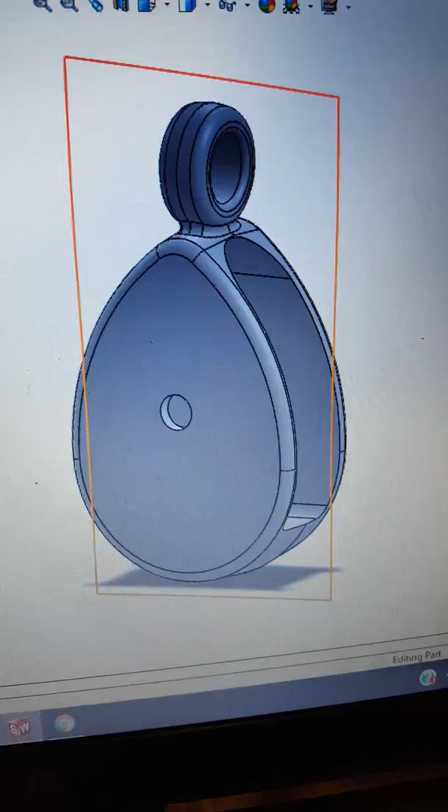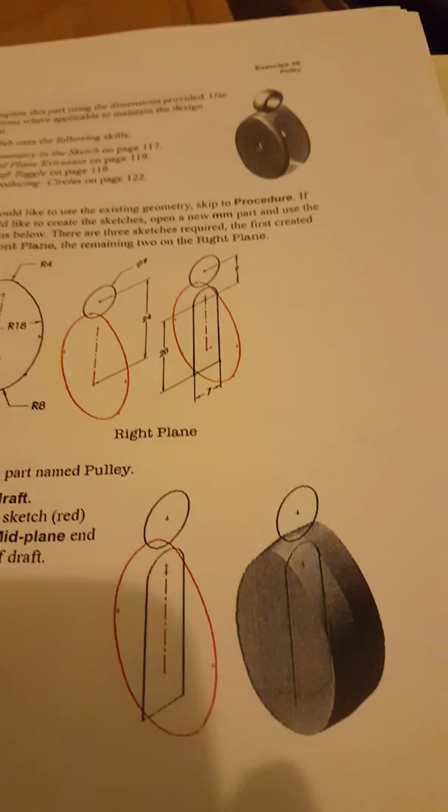Alright, Ham and Jaron, I just built that part right there. Now I did it using them numbers right there. That's what the outcome's supposed to look like. I'm using that right there and that right there.

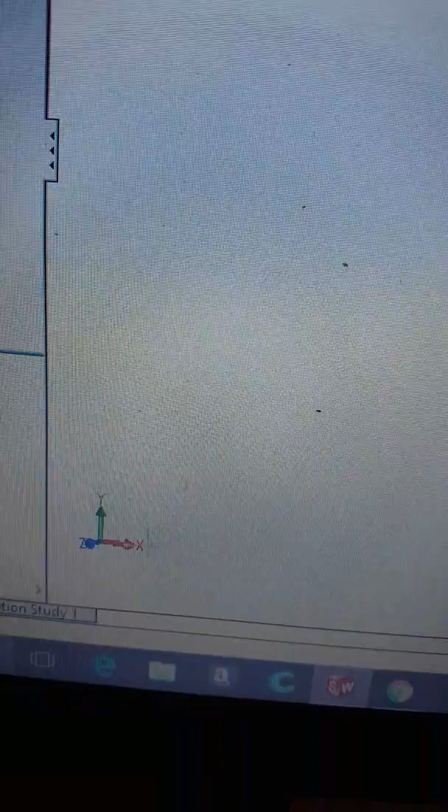I'm reading the book. Now when I point to the spot, it's going to show up as orange. That dot there, that's my origin. It rotates, that's actually the X, Y, Z axis. Let me hit it right here and show you the origin inside there. See that dot? That's the origin. Everything is measured from that point up or down.

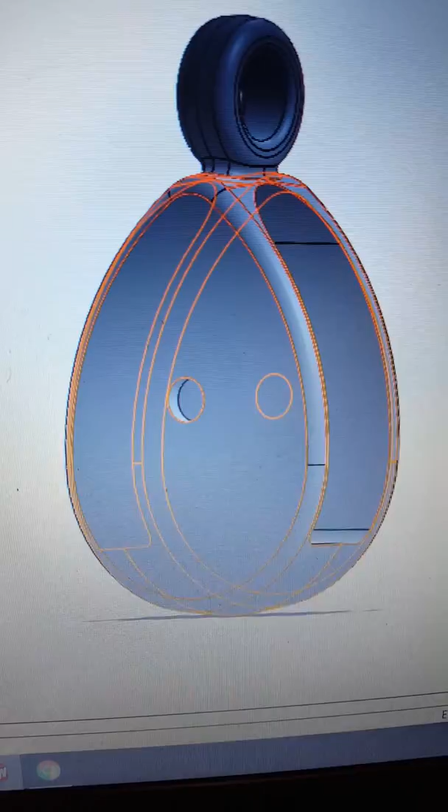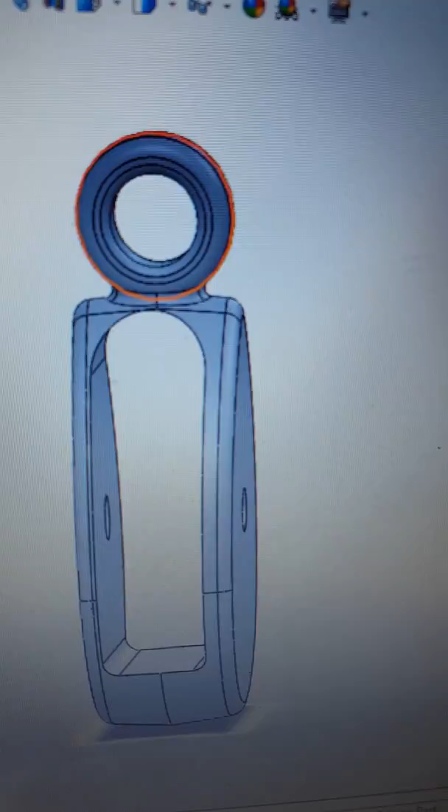And that's the circle or egg I drew. Then once I extruded it out, it got that big. Then I cut my slot in there. Drew that, cut that out. Then went back and drew that, what you see in the orange highlighted now. Cut him out. Cut the circle out right there.

Turn him to the side. Drew that circle right there. Let me turn it around so it'll line up perfect for you. Drew that circle, then cut him out.

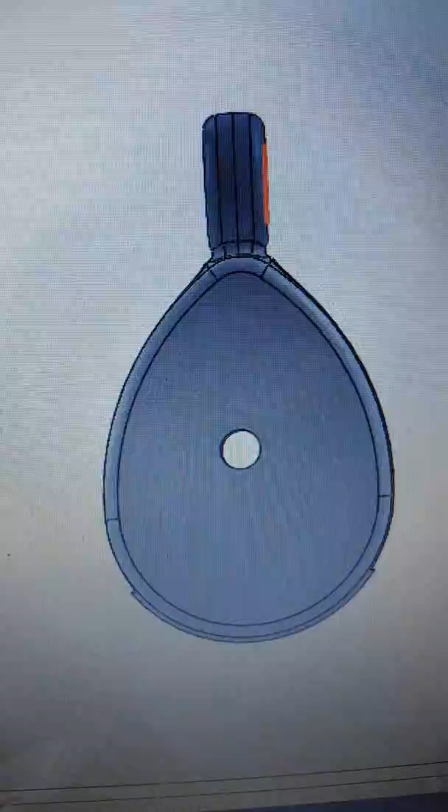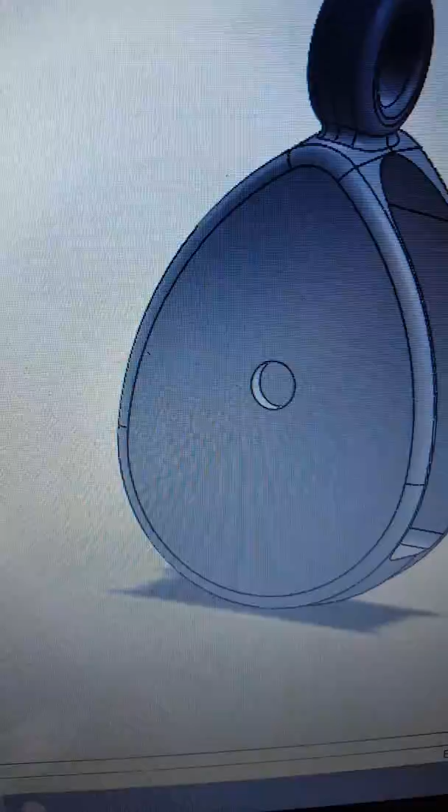Then I added what they call the fillets. That's rounding my edges off because it was sharp and square with corners on them. The first fillet I did was on the inside down there. See how that's rounded out right there? That's fillet number 1. And number 2, I came and went around my edges up there. Then the third one was inside there. And the fourth one was right around the neck on it right there.

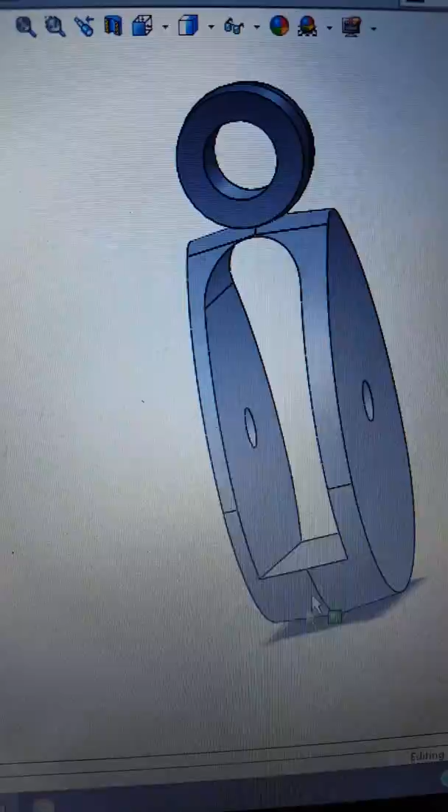See that? That's how it looked before I put any of the little fillets in there or rounded edges on it. Right there.

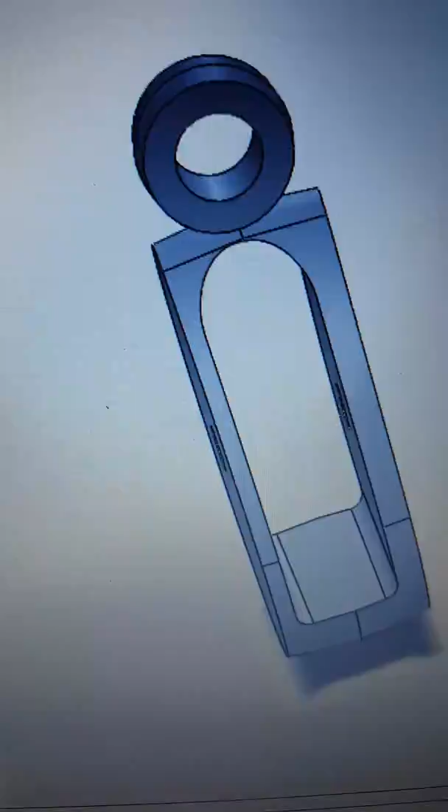Put the first ones on, watch the edges turn around. See on the inside I snapped to it down there? Now the next one's gonna be these outside edges or corners. I'm gonna round them off. Boom. See how they change?

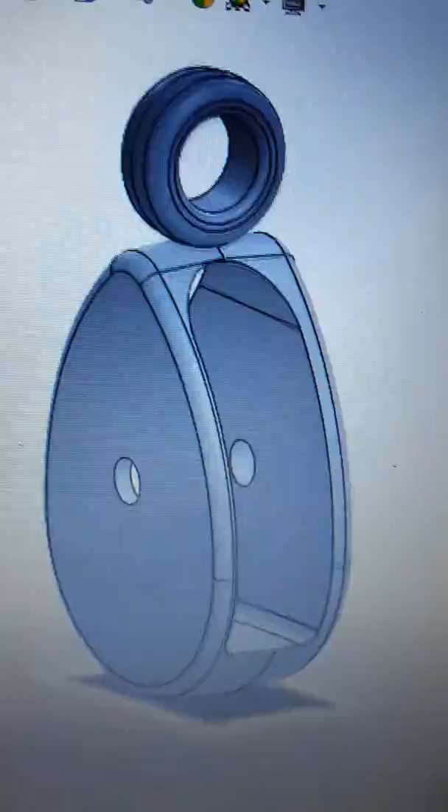See the square? Now watch right inside that circle there. See how that changed from squares to rounded, non-sharp edges? I'll look right there real careful and watch this. Added the last fillet. Boom. And there it is.

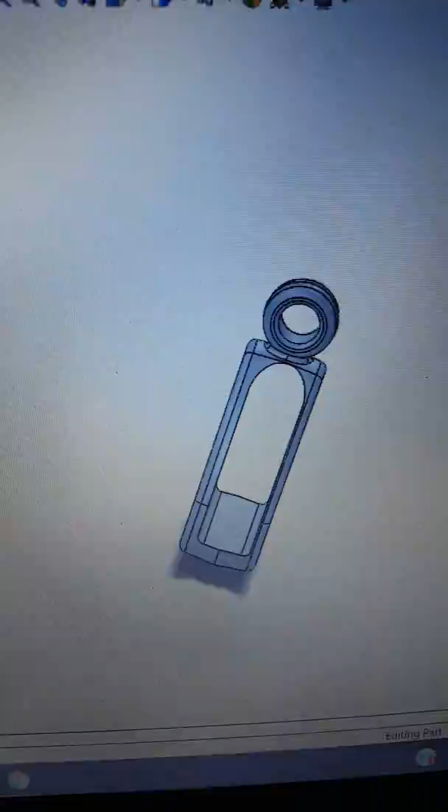All part of my homework, fellas. That other software program I gave y'all to use, its expiration is almost gone on it. I only had 1 year of free service with it. This one here is way more complicated than that one. Not really complicated. I'll put it this way, that stuff is a Volkswagen, and this software I'm using now is a Ferrari. Put it that way. Way better performance.

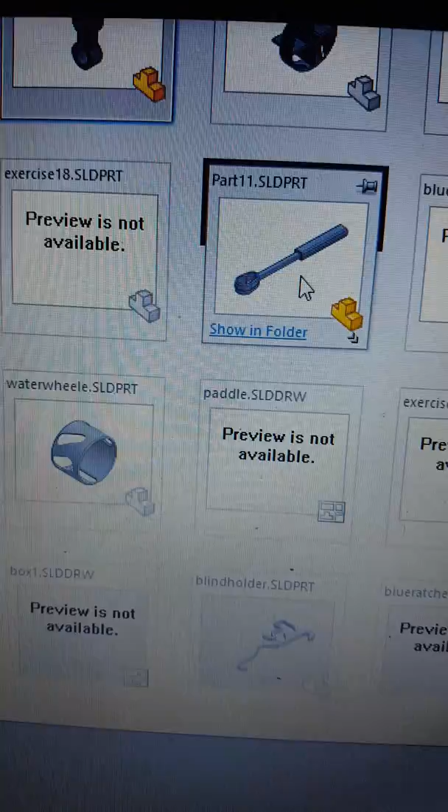Now, let me see here. Show you some of my other homework lessons I've had to do. That's something I'm working on right there. I built that ratchet. That's a box I'm working on, something else, and another part I had to do. All from just this part right here I'm getting ready to show you.

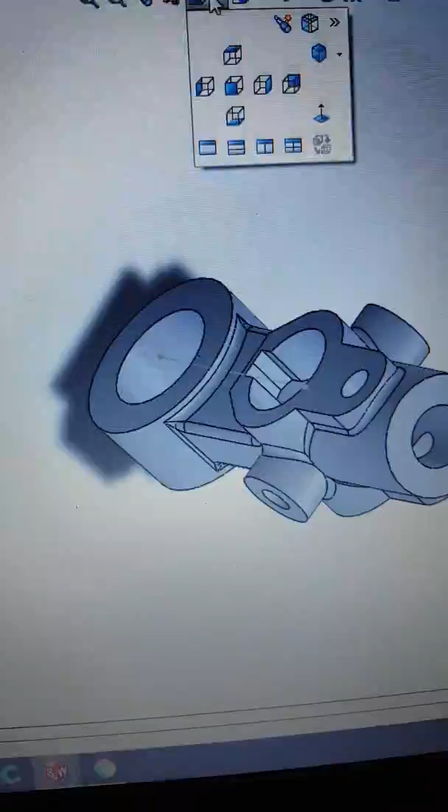I built that from just numbers. Numbers only, that was it. Built that whole thing from just numbers. Gave me numbers and a picture of what it's supposed to look like when I got finished.

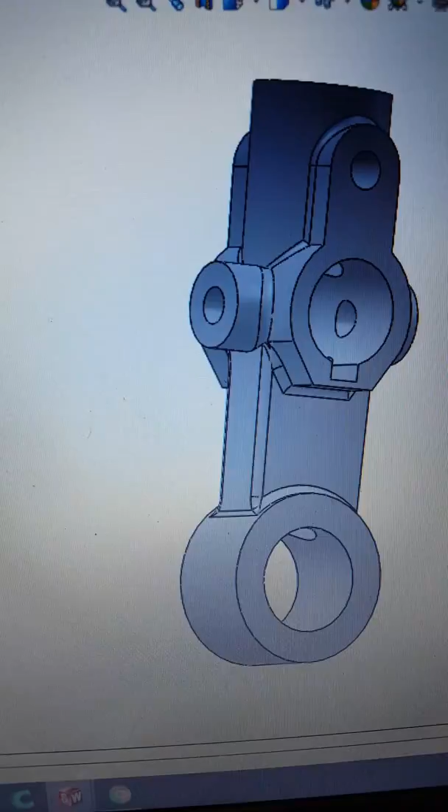Let's see here. Let's roll it back to there. That's what it started with, that one little circle. Then I came in, put my center line on there, added another plane to it.

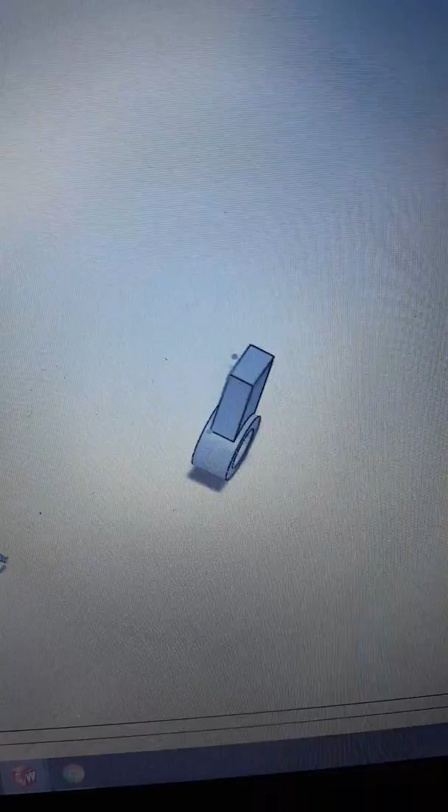Then I put that piece on there. Watch him now. Watch how I transform in front of you. It's step by step of what I did to it. Now you missed some steps in there.

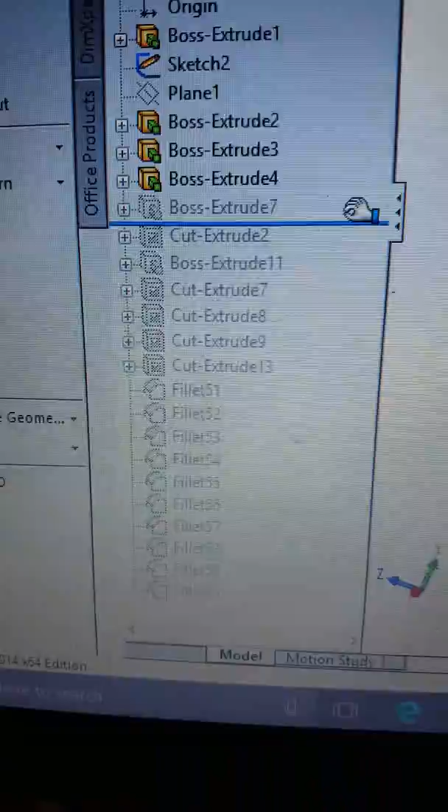Just what I'm doing over here—all of that right there, not highlighted, is what I've done already. So what I'm doing is sliding down and adding the next part to it. And the step that I took, see how it just popped out? Watch how it changes again.

Cut extrude. Might be a hole through the middle this time. Yep.

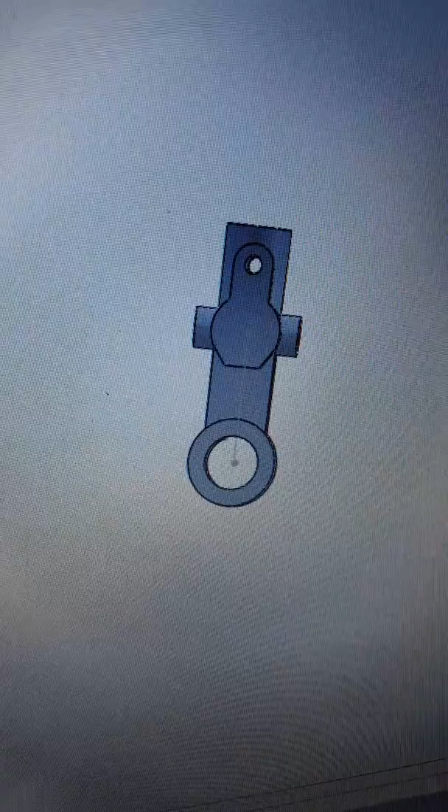Watch him now, watch him grow some more features. Boom, no hole in there yet. Watch him cut extrude. Put the hole through the center right there.

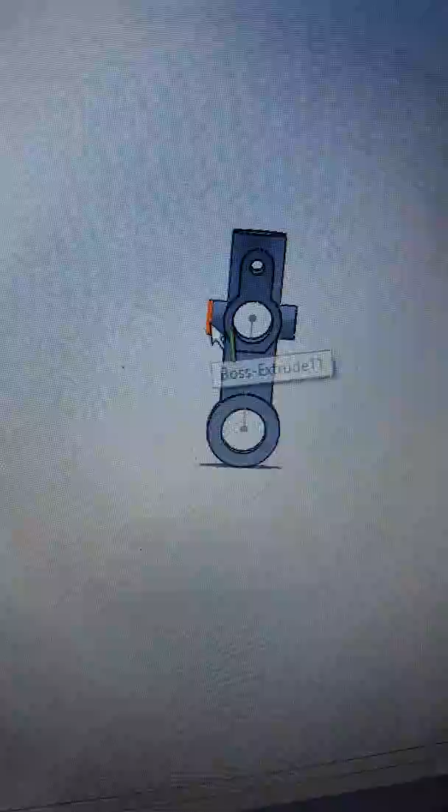Now see, when I first built this part, I put the hole in there first and then added those two. I had to start it all over because it had a solid bar going through the middle, so I had to come back—that's why you saw me put these extrusions on the outside edge first, then come back and put my hole through the middle so it would cut the material all at one time.

Extrude cut number 8, you saw the hole pop up there. Got another extrude cut, number 9. Watch him now, hold on.

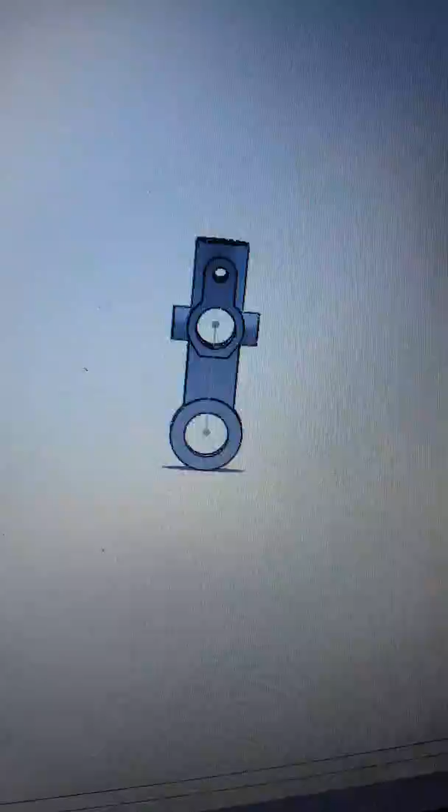Let me blow them up for this one. See that? I extrude cut all the way through there, and stopped it before it got to the bottom down there.

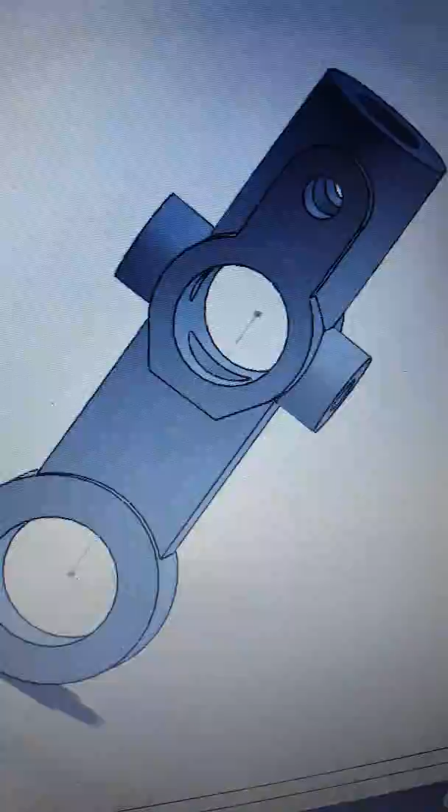Boom, next one—that's where you just saw the holes pop in the side right there. Next extrude cut should be my little groove going all the way through there for the slot pin to sit in when it's actually installed. Wham.

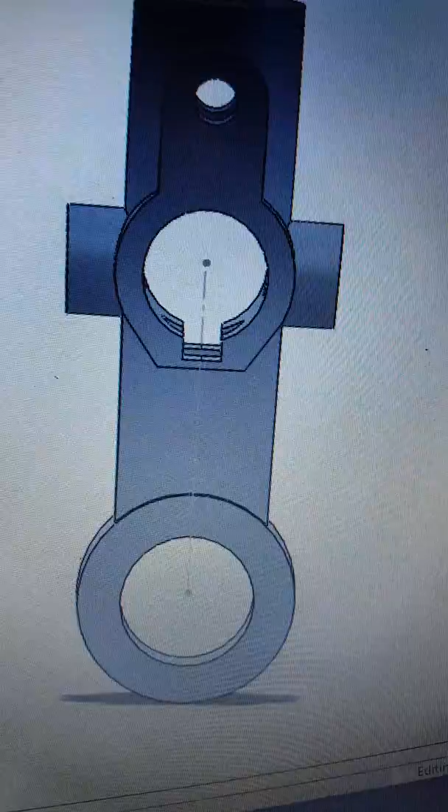Now I'm just going to add all my fillets back on there. This took a long time with the fillets—you saw them pop in right there. Because I couldn't just do a regular fillet like I did on the other ones, I had to do a face fillet, which is more time consuming. But then again, at the same time, it's not.

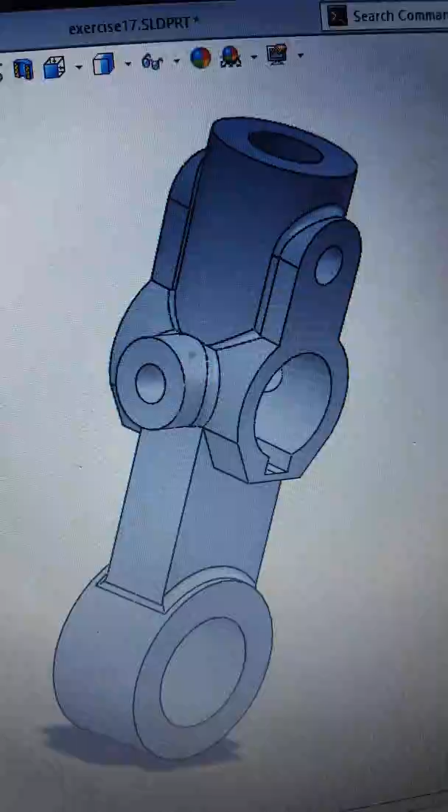See how the fillet's popping up around it? They're taking the square edges and rounding them off. See that? Watch this side.

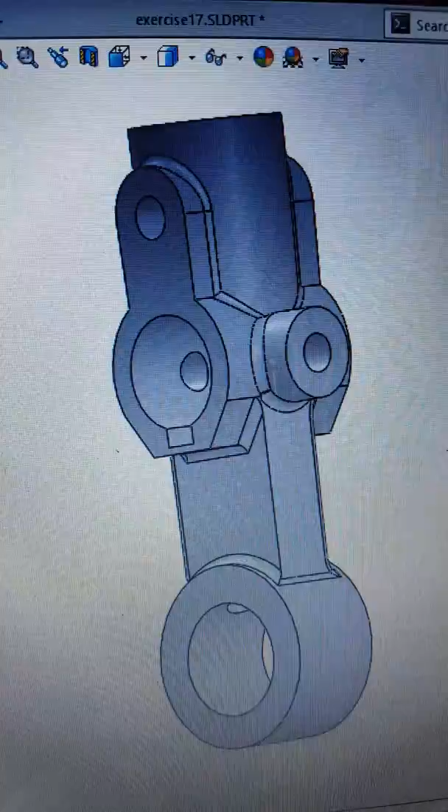Well, I guess that put them in up there somewhere. Let me roll it all the way to the end. Haha, you see what I see? If you see what I see that's missing on there, let me know—see if you were paying attention.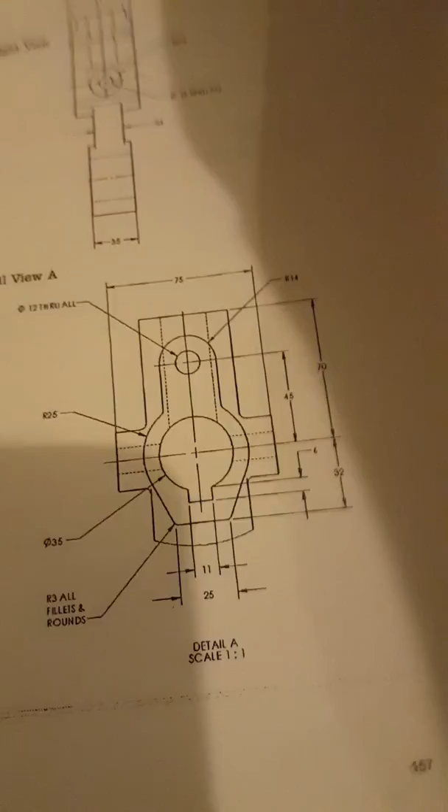And that's my homework. And that was it, that was it. That's all you get—numbers and a picture of what it's supposed to look like.

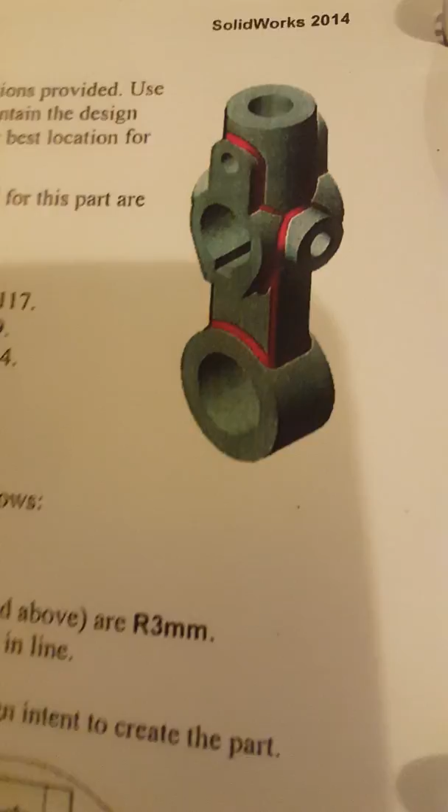So if you put them numbers in there correctly and actually use the software, it's logical software, logical thinking. Basically just learning all of the commands, where to find them at, and then saying, okay, this is the shape I got, this is what I wanted to do. Simple as that.

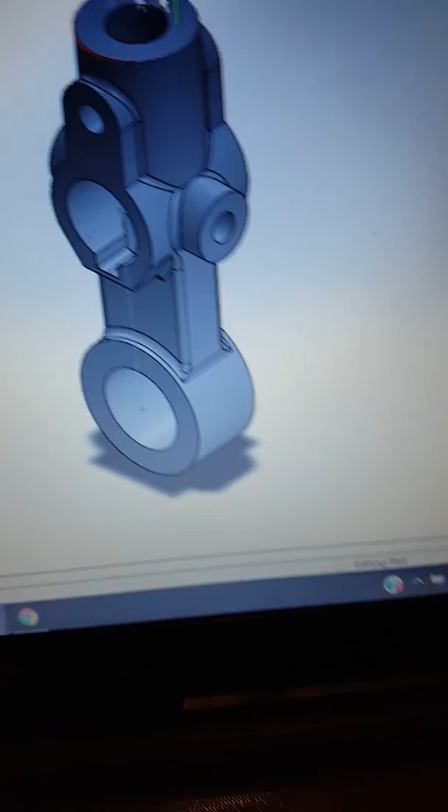What changes? I don't know. I'm gonna save them anyway. And I'm gonna save this one here. It took me 3 days to do this one because I did it right on the first try.

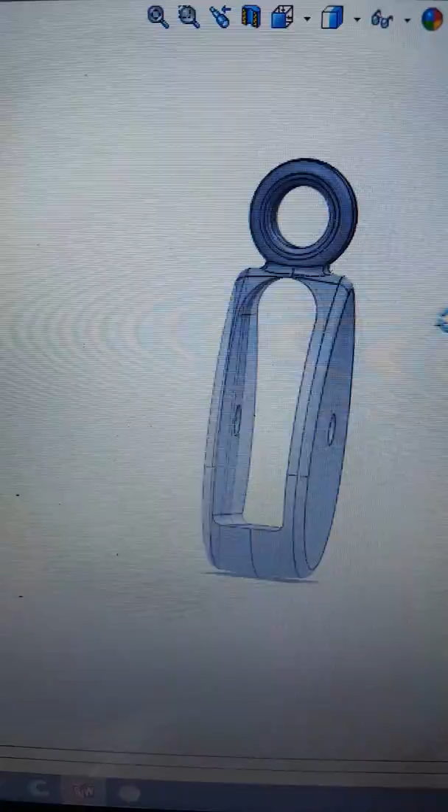No, I did it right on the second try. And then I deleted it so I could do it again, but I waited 3 days before I got to it and forgot how I did it. But that's a 3-point tangent arc.

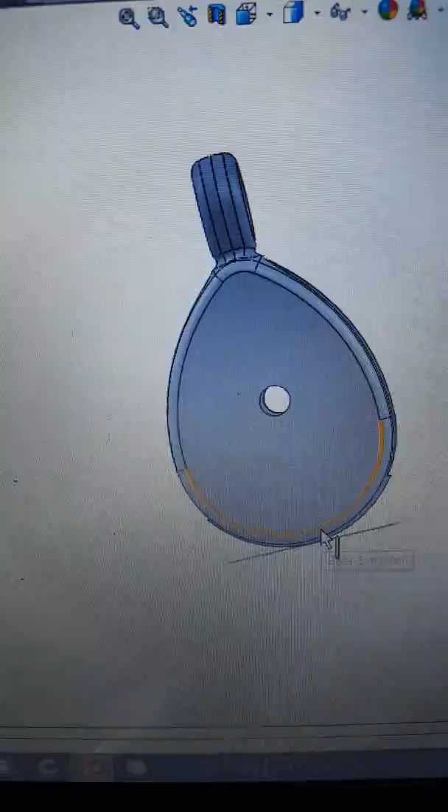That's a 3-point tangent arc. That's just a regular tangent arc, and that's a regular tangent arc. So I had to draw these two—I drew this one, mirrored it so that it copied perfectly over there, then drew my 2 arcs right there, then extruded it out to that width that you see.

It was solid like that all the way around until I drew my next feature and cut it.

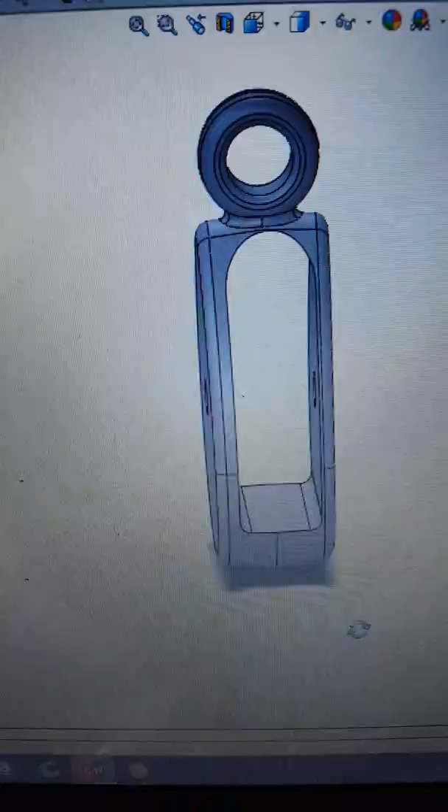Save it all, cause I will mess that up. So I'm gonna redo it again. Later.